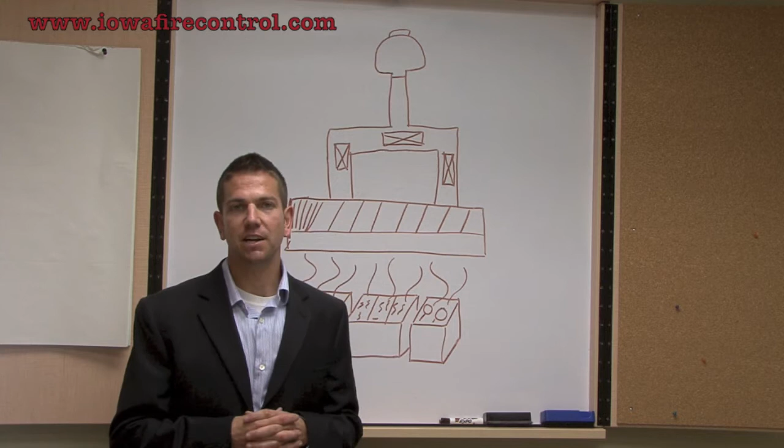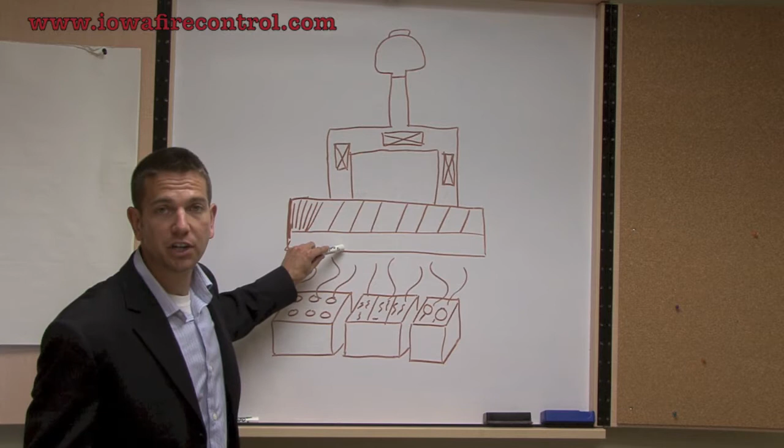What we want to talk to you about is Grease Lock. What I have up here is a drawing of a typical kitchen exhaust system, and the problem with typical kitchen exhaust systems is the grease-laden vapor comes up and goes into the wall-mounted canopy hood. When it hits that hood, it hits those UL 1046 style metal baffle filters.

So lots of those baffle filters are taken out either on a nightly, weekly, or at least monthly basis. Those of you who take those out know they're a real pain to actually get out and clean, having to run them through your dishwasher or take them to the local car wash to get them clean.

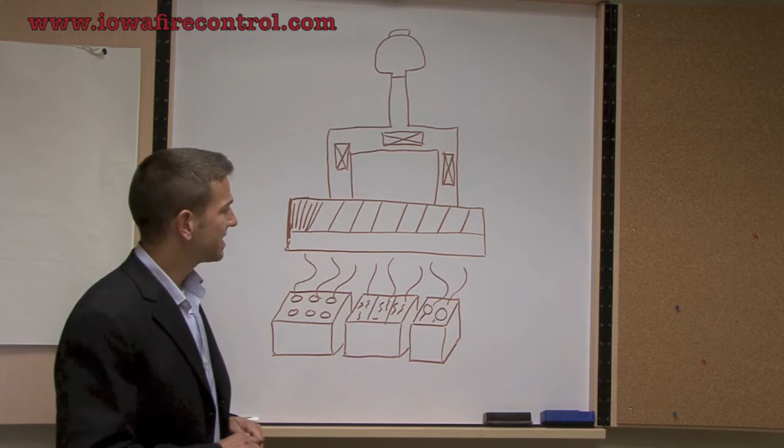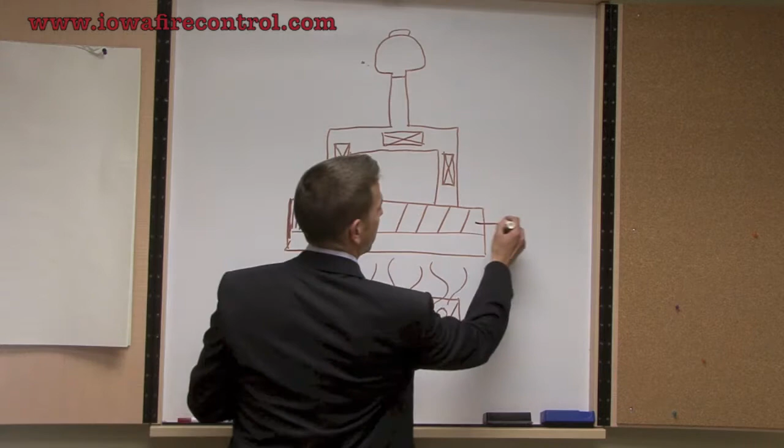So the whole problem with the typical kitchen exhaust system is all the grease is caught up here, and we sell products that catch grease up by the fan. That grease moving through here, regular baffle filters catch about 25% of the grease that moves through the system. So the problem is, why not catch 100%?

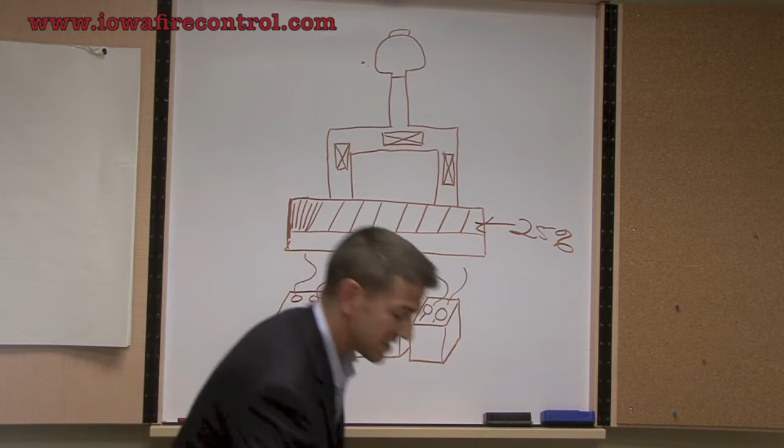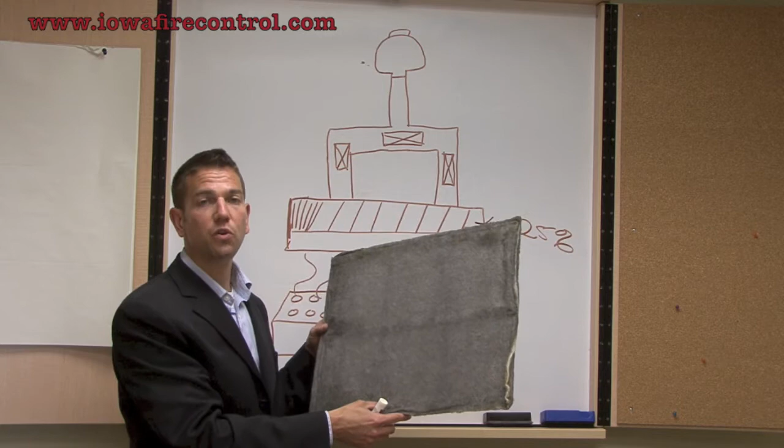This is what I want to introduce you to. This right here is the GLS, the Grease Lock System filter. It's a 16 by 20 inch wool fabric mesh filter that is allowed within the parameters of NFPA, the IMC, and the IFC. So pertaining to code, this product is good to go.

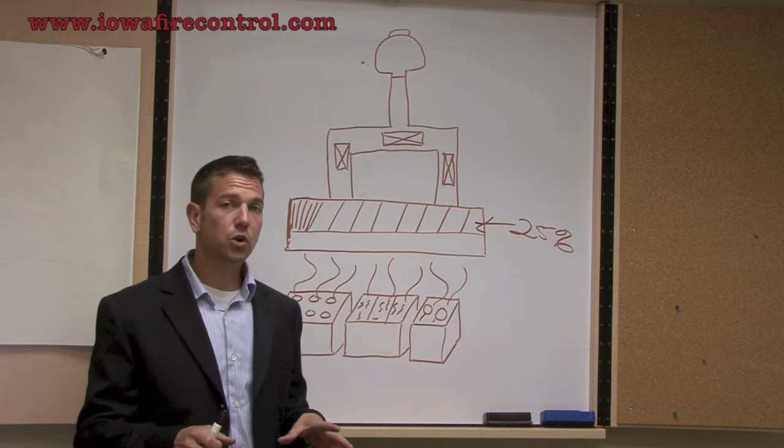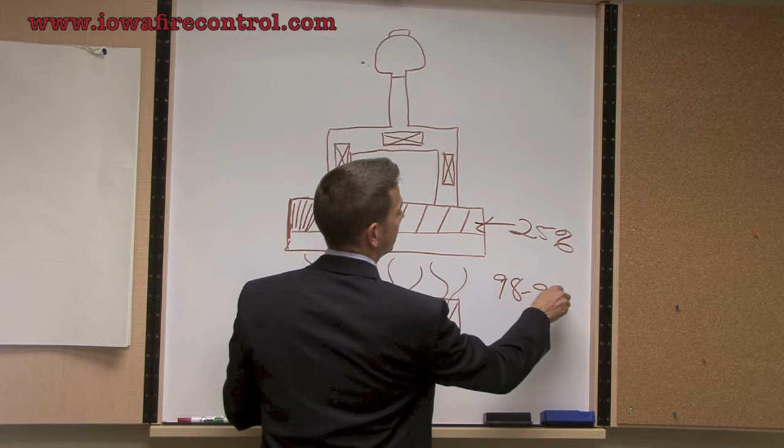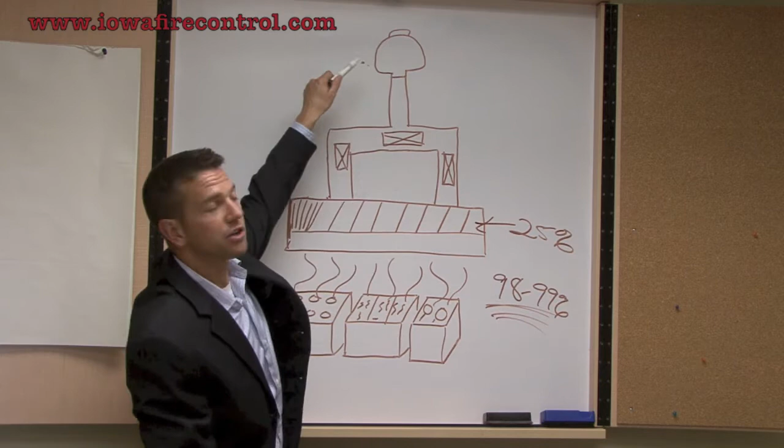What it does, in conjunction with the baffle filter, is catch 98 to 99% of the grease that moves through the system. This is very important to note, because above the filters, where there's access panels, hinge kits, drip boxes or sand boxes on the roof that are needed, and many times we have to clean the HVAC coils on the roof because of grease being created by the hood cleaners—all that stuff goes away.

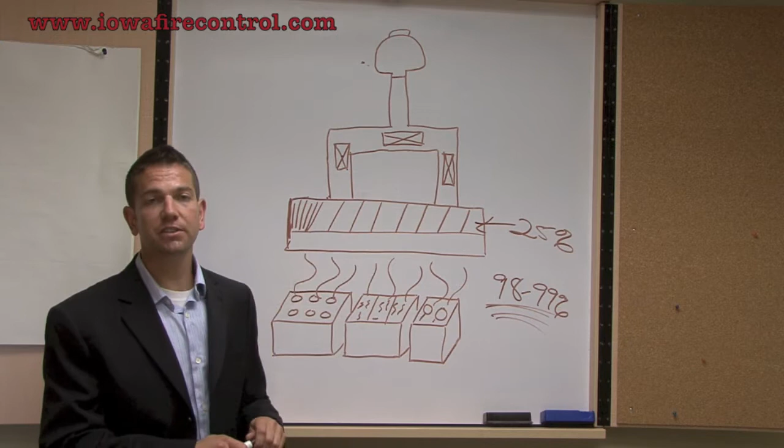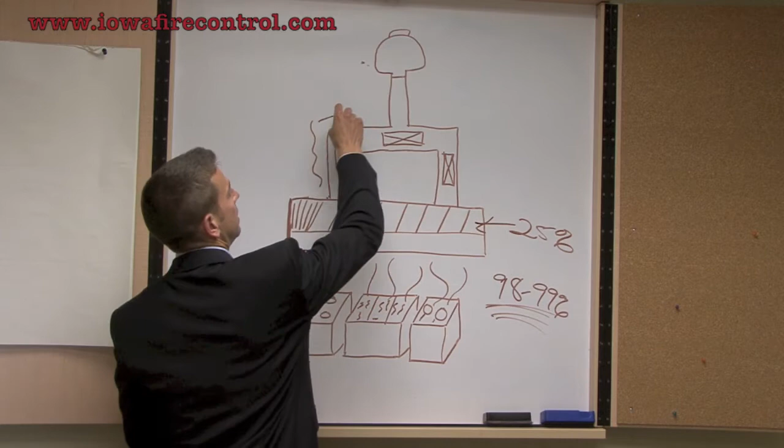Because when 98 to 99% of that grease gets caught in those wool filters, only 1% of grease moves through your system. As per NFPA code, until that grease is 0.078 inches thick, your system does not have to be cleaned. And this is what I'm here to tell you about.

Folks, this is an amazing new product, and what we want you to know is that it works. We're installing it in the state of Iowa, Nebraska, and Missouri, and we're launching this product as hard as we can. So if you want fewer hood cleanings and less wear and tear on your system, the Grease Lock system is where it's at.

What we do is install a channel right below your baffle filters and right above your baffle filters. This picture isn't going to do it justice—I would certainly come out and talk to you once you decide you want to look at the GLS system. But what we do is put that channel below and above, and the wool mesh filter goes on the outside.

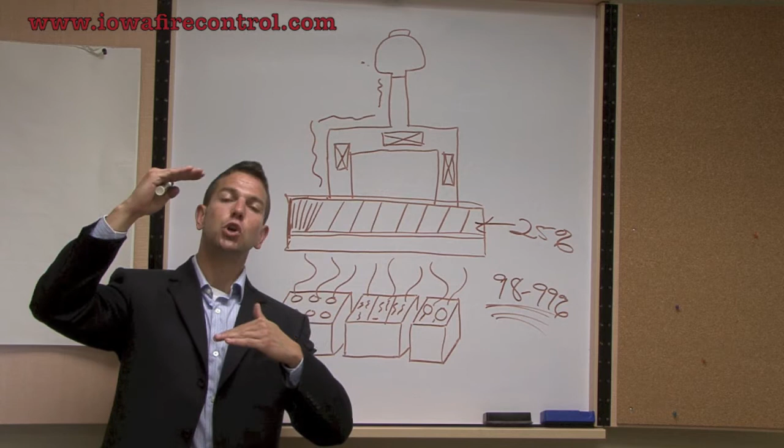Those filters need to be changed periodically due to the grease that accumulates on them. They get changed on a basis depending on the volume being cooked at the store and the appliance underneath the actual filter. Lots of these filters underneath fryers, flat tops, or any other type of appliance, you're talking about 30 to 60 days on the change.

When you're talking about char broilers and some other types of appliances, if it's a high volume, 60,000 plus a week restaurant, you're looking at maybe getting those changed once every 3 to 7 days. So in some particular systems, this product won't necessarily be the best fit—it will still work, but may not be best for concerning amounts of hood cleaning.

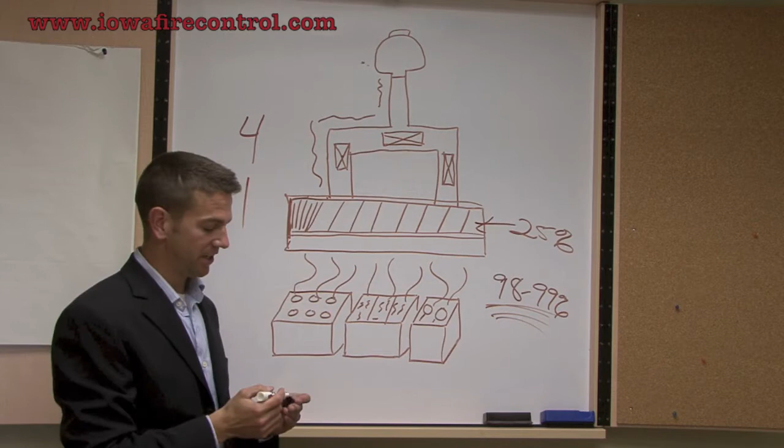What we're seeing is that typical exhaust systems that were being cleaned 4 times a year are now being cleaned once a year, and that's basically under-promising. What we're finding is that most typical exhaust systems, if they're getting cleaned 4 times a year, only need to be cleaned once every 18 months or more.

So what this means is that if you're paying $250 per hood cleaning per quarter—which if you are, you have a very small hood—but if you're paying $250 per quarter and would have paid $500 to $750 in 12 to 16 months, you're now going to pay that $250 in that 12 to 16 month period or longer. So the savings on hood cleaning alone is amazing.

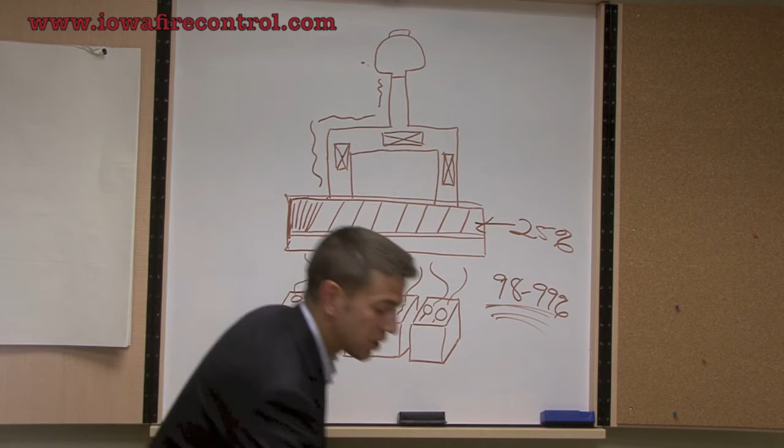This is an environmentally clean product, and it's compostable and biodegradable. So this filter, once it's grease laden, we just go ahead and toss it out with the trash. Just so long as you don't stack 40 or 50 of them together and put them out in the hot sun on your sidewalk, you should be good to go.

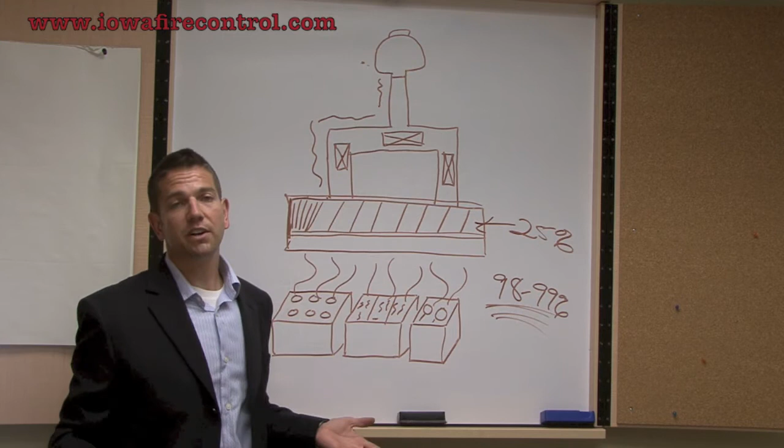So the GLS filter is an amazing thing. None of these problems with the access panels and the grease on the roof will be there anymore at all. Your system will need to be inspected on a regular basis. NFPA code says that if inspected and it's not found to be 0.078 inches of grease, you do not have to be cleaned—this means it could be years before you're cleaned again.

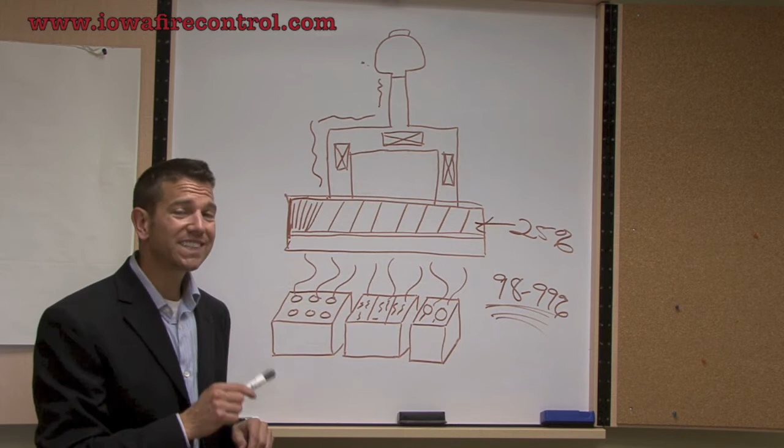Think about the savings. Think about the hassle you have to go through to set up hood cleanings, to take new bids, to get other bids, to clean up your system. Think about all that hassle going away. Plus, if you're taking those metal style UL 1046 baffle filters out on a regular basis—nightly, weekly, whatever it might be—you're no longer going to have to do that.

What you're going to have to do now is clean them once a month, and if you have low volume cooking, you might only have to clean them once every 2 months. So this product, as far as we're concerned, is the future of hood cleaning. It is the absolute future of hood cleaning.